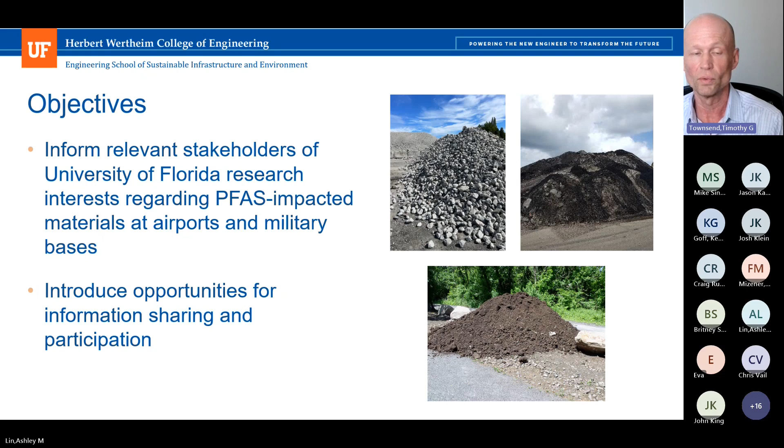So I have a team of students here who are going to present here in a second. So I'm gonna let them go through some of this. But next slide, please, Ashley.

So big picture, again, I don't need to share with you the fact that PFAS is a challenge when it comes to these types of facilities, whether we're talking about airports, private public airports, or whether we're talking about military bases, DoD facilities, federal facilities. But the use of AFFF, of course, has resulted in challenges with regard to PFAS.

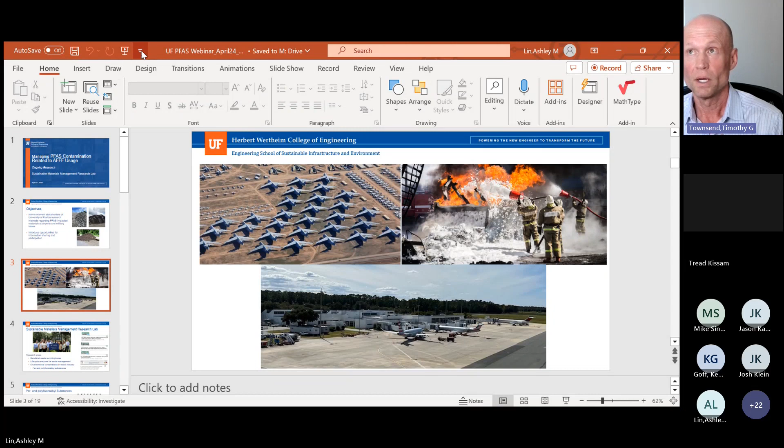Our involvement with PFAS really started looking at municipal solid waste landfills and what's in leachate. But PFAS is everywhere. One of the big challenges is at these facilities where AFFF is used.

That involves not only potential contamination of soils, and this is something that a number of facilities are dealing with or trying to figure out what to deal with. It also involves the pavements. And so asphalt and concrete pavements at these facilities are growing interest because of the amount of historic AFFF and PFAS that now resides in them or has been applied to them.

Looking at not only what to do about the existing pavement areas that have PFAS in them - are they a potential source, an ongoing source, for example, to PFAS in the environment? But what do you do with these materials once they are ultimately discarded?

Concrete and asphalt, very heavily recycled materials in the state of Florida, in the United States. And so a very valid question is how does the presence of PFAS as a result of AFFF in these pavements, how does it impact recycling opportunities? Or does it all need to be landfilled? And what are the issues associated with that?

We've got a new project which we'll talk about with the kind of, it's an organization, SERDP, which is a DoD, DOE, EPA organization, with a number of other institutions around the country. They're going to be looking at this issue. And what we wanted to do was to give you not only an overview of that ongoing project, but just a few of the more general PFAS related issues and discussion topics that are out there, and share a little bit about what we're doing at the University of Florida.

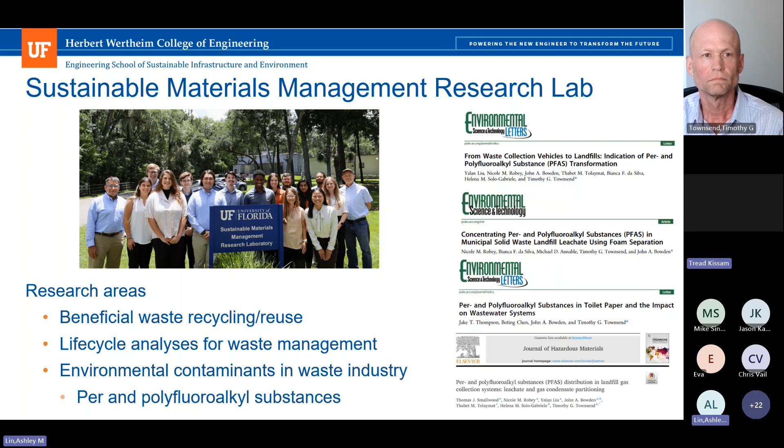We also look at environmental contaminants and their potential releases through our current management strategies of solid waste. This is where our research with PFAS ties in. PFAS are these new emerging contaminants, and we've already published a number of works related to PFAS in different solid waste streams. Many of you already know what PFAS are, so I'm not going to bore you with background, but I want to introduce some topics that will show up later in our presentation.

PFAS are not just one chemical, but potentially thousands and thousands of different chemicals. They're classified by having these carbon-fluorine bonds. They have some pretty unique chemical and physical properties, being both hydrophobic and lipophobic. They're also good surfactants, thermally and chemically stable, and this has led to their extensive use in one particular product we're going to talk a lot about, which is aqueous film-forming foams, or AFFF.

For the last 50 to 60 years, the main ingredient in these firefighting foams has been PFAS. There are about 4,000 different chemicals, and the types of PFAS used have changed over the years, which has led to issues. PFAS are thermally and chemically stable, which means they're also thermally and chemically stable in the environment.

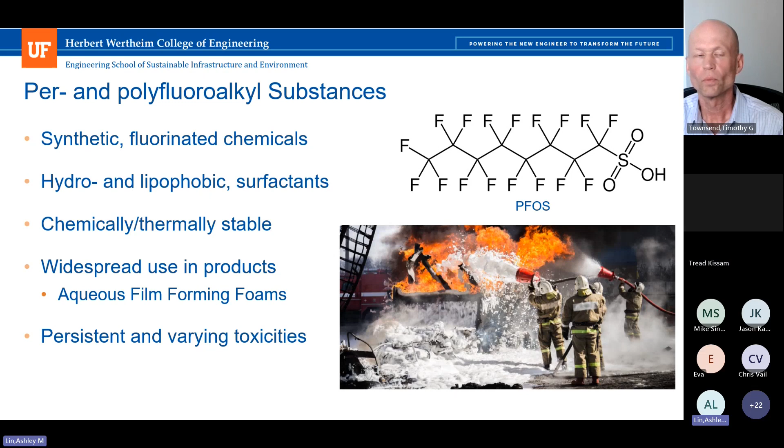With new toxicity information available, there's been a push from regulatory agencies to start regulating certain kinds of PFAS in different environmental matrices. This is where there's been a drive for this research we've been doing. Some background on our previous work: we've looked at things like wastewater sludge and landfills.

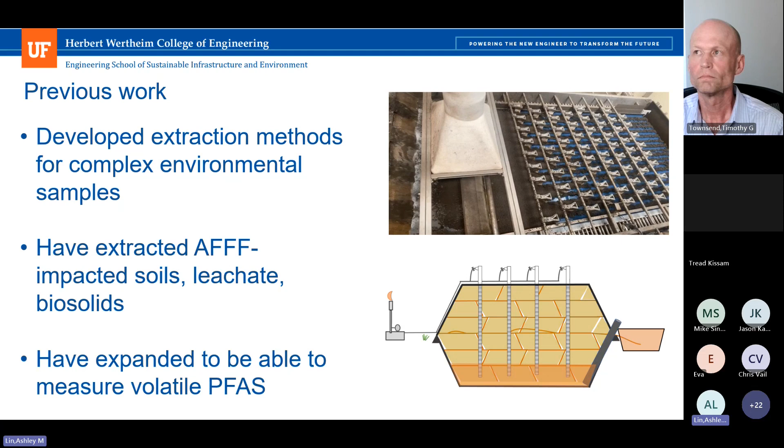These are complicated matrices to work with. We've also looked at landfill gas, which not a lot of labs are analytically capable of looking at for volatile PFAS. Building upon all this work, we've developed a very robust method, or number of methods, to look at different kinds of PFAS depending on what we're interested in.

We have pretty advanced analytical capabilities compared to all the other labs, especially in the Southeast, that could do PFAS analysis. We can do target analysis of 92 PFAS. We have a targeted method for volatile PFAS that we just developed. We also have a non-targeted analysis method where we can potentially look at these thousands of other PFAS that we're missing.

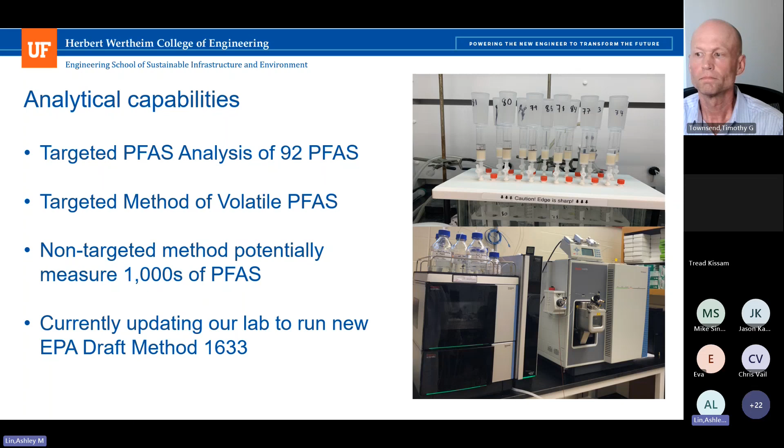There's potentially thousands and thousands of these other PFAS that could be used that are going under the radar. We're currently working to update our lab to also run the new EPA draft method 1633, so that way all our results are comparable to other laboratory groups running that method.

This previous work really sets us up well to answer some of these remediation challenges that Dr. Townsend mentioned previously. AFFF and PFAS impact has become a very hot topic recently, and there's thousands of sites across the United States that have been identified as containing high levels of PFAS through the historic use of AFFF. We see not only remediation needs regarding soil and groundwater, but an issue Dr. Townsend brought up.

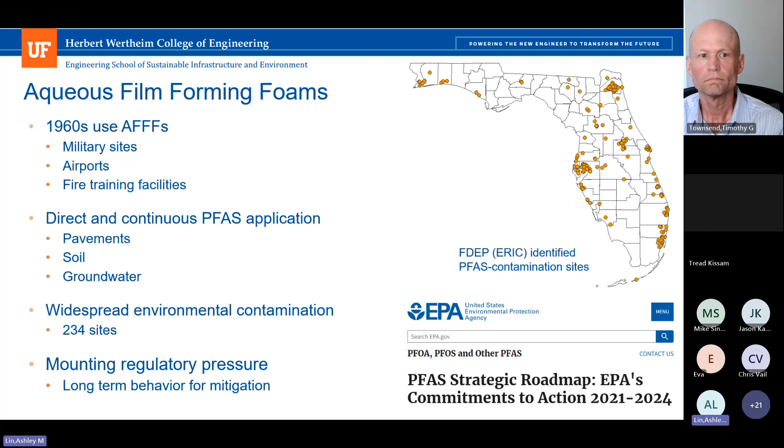Something that Allie's going to talk about is the pavements. And then also, once you have all this impacted material, how do you actually manage it in an effective way? That's something I'm going to pass over to Ashley to talk about, which is the management of soil once you've addressed excavation.

Just to reiterate a couple of things that Dr. Townsend and Jake mentioned, there's this real push for regulation nationwide with regard to PFAS impacted materials. Currently in our management strategy, we might have an impacted site, and what that might involve for remediation or management is that we go to that site, we excavate these impacted materials, and traditionally what we do is we will landfill that material.

Through research, even in our group specifically, we understand that landfills aren't a long-term management strategy for PFAS because it's essentially just like a retainer for it. Eventually, PFAS mobilize from landfills into the leachate that's generated, or even in the gas that Jake had mentioned earlier. So really landfilling or even stockpiling ultimately is just this Band-Aid solution.

Ideally, we'd be able to actually address the problem and treat the materials. But there are a lot of questions remaining with traditional treatment technologies or even emerging treatment technologies with regard to PFAS contamination. So obviously, a lot of people are interested in this issue, and a lot of research has been conducted on PFAS treatment.

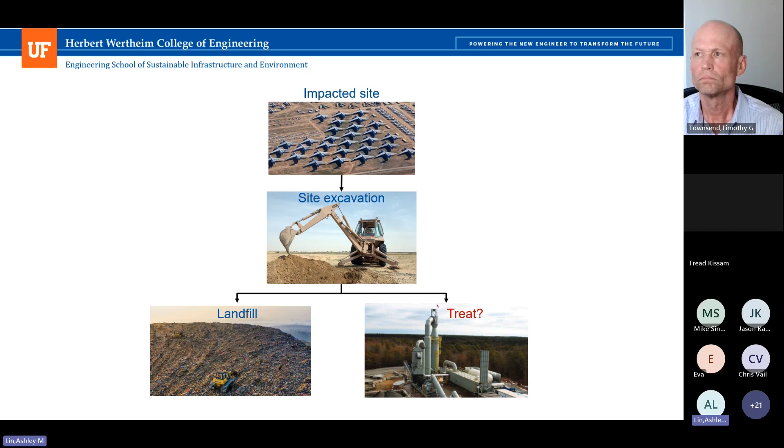So what a lot of research and science has shifted towards is investigating traditional technologies such as thermal desorption paired with oxidation, where essentially you just take contaminated media, you desorb the contaminants off of it at a lower temperature. In this case, it's PFAS, right? And then that off gas gets sent to a higher temperature unit where the destruction really occurs.

But we have a lot of knowledge gaps in terms of PFAS. So in an ideal treatment scenario, you might have a PFAS contaminated media. You put it through some form of treatment, and the outcome that you're looking for is that you have made all of the fluorine and the potential PFAS present in that media inert. And so if it leaches, which it shouldn't, there won't be environmental risk or harm associated with that material. And then we can effectively manage it without having to worry about environmental implications later on.

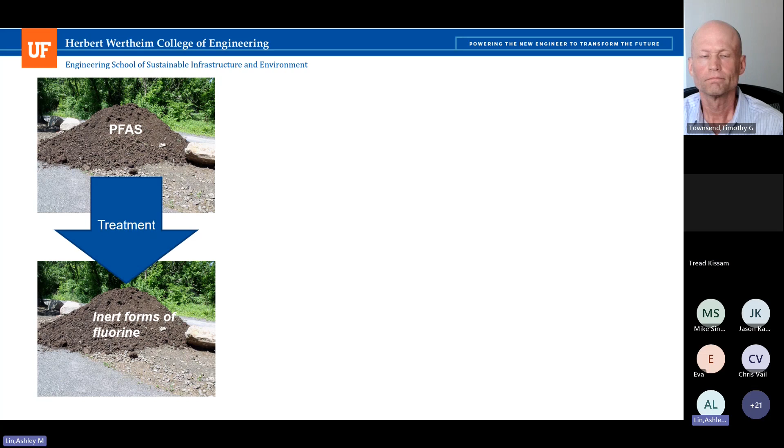So when we think about traditional thermal treatment and apply it to the same concept, a lot of the issues have to do with primarily the scale of it. So at the laboratory scale and even smaller pilot scale studies, people have done this work and looked at PFAS treatment and desorption oxidation. But when we talk about large quantities, there really isn't a single study out there that's been able to successfully assess if this technology is efficient for PFAS treatment, and also really assess the harm of the emissions that come off the material.

So just to kind of walk through that emissions part of it, it's essentially you have, for example, one PFAS present in your soil, which this is just an example. There are thousands, obviously, and hundreds potentially in impacted materials. But PFOA, for example, we might take it through a traditional remediation technology.

But if you don't apply enough thermal energy and you're not applying the correct analytical tools, you're going to miss some things, and potentially there will be this formation where you fragment only partially, and then you form these short chain, we call them products of incomplete combustion. So CF4, C2F6 are some examples, and these are really persistent and also mobile in the environment.

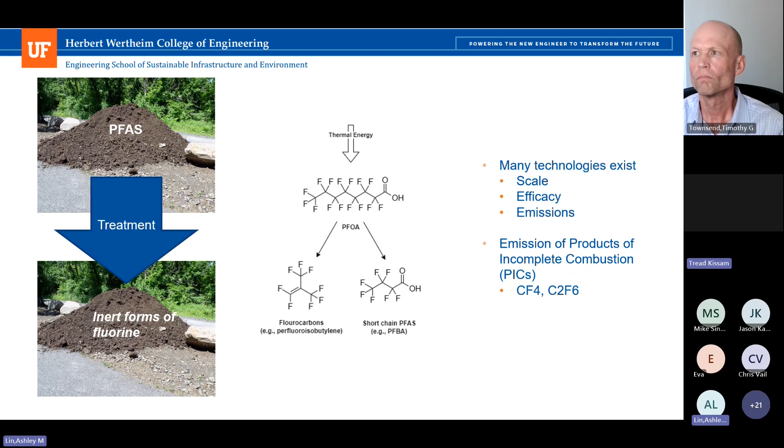So there's really that major question about emissions, and we have a lot of ongoing research at the university related to these problems in PFAS, but also just the things that we're going to really focus on today, which is this DoD project, essentially, that falls under DoD. A lot of you have probably heard of it.

I'm sure a lot of you are familiar with the grant or the project, but we're one of many teams that's interested nationwide in understanding PFAS impacts at military and airport and DoD sites. So I'm going to pass it off to Allie, and she's going to talk a little bit more about project specifics with this upcoming work.

Thanks, Ashley. Yeah, just to give a little bit of background on our work with SERDP and where we go from here. So in 2022, there was a request for proposals to investigate the leachability of PFAS from these pavements that have been impacted with AFFF at the facilities that we've been talking about so far.

In 2023, we were awarded the SERDP grant to pursue this research, and now as of 2024, our contract has just been initiated. We have almost the green light to get going with this work, which is very exciting for us, and we're still in the early developmental stages, which is why we're here to talk today.

To give a little brief project overview, we think about the project in 3 different tasks, just to help us compartmentalize what's going to be going on.

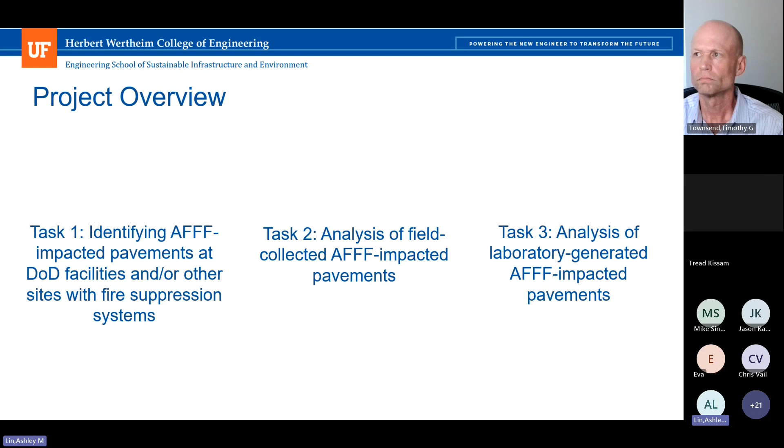In task 1, we are going to work to identify AFFF impacted pavements at DoD facilities and other facilities that have fire suppression systems using AFFF that has PFAS in its formulation. Thankfully, there's great record of where AFFF has been used, but this only tells us so much, and there's a lot of anecdotal information that we lack as a university, and that's where stakeholder information becomes very relevant to us.

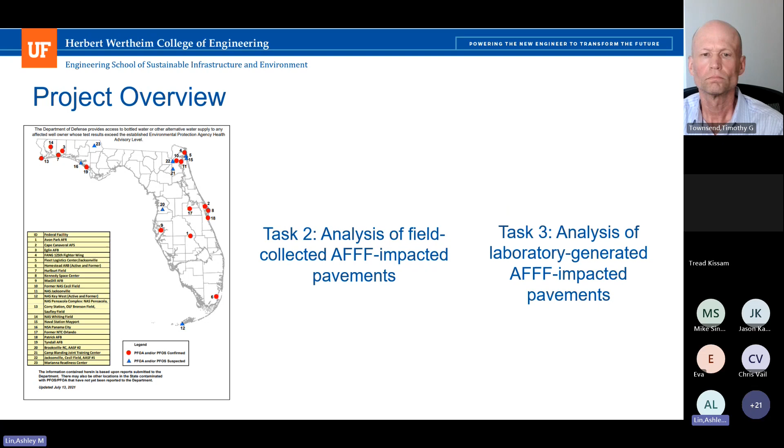Then in task 2, once we identify those sites and narrow down our scope of work, we're going to go out and collect some AFFF impacted pavements, ideally with the help of some facilities, and we'll analyze them in the lab with a variety of tests to evaluate the mobility under different conditions.

In task 3, we will take it another step further and generate our own pavements here in the lab and expose them to AFFF and evaluate the leaching in a lab-controlled setting.

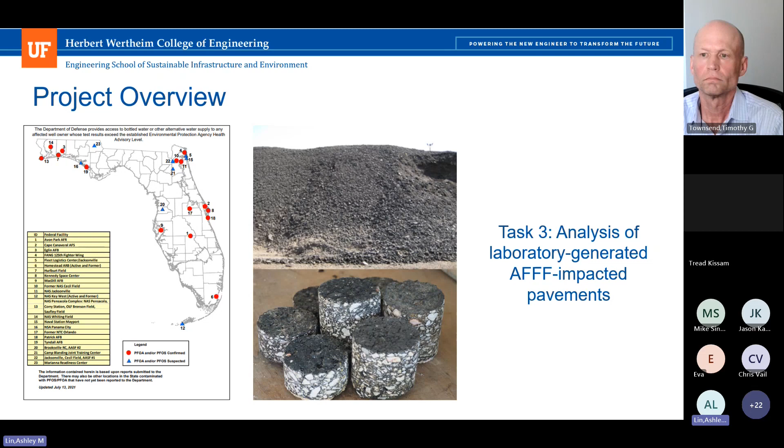Those field pavements give us a great wealth of knowledge, but they really only give us a snapshot of that pavement's life. That pavement had a life before we met it, so we are going to look at the lab-generated ones to give us a more thorough look at the lifespan of the AFFF on the pavement. We'll do that in a couple of different experiments.

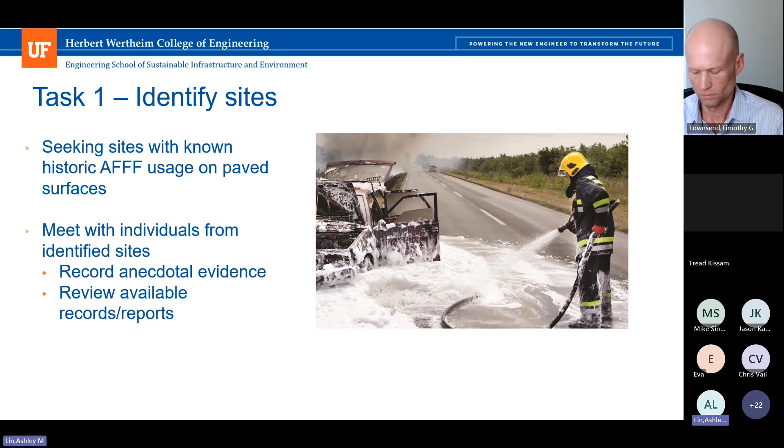Diving further, as I mentioned, we're seeking sites with known historic AFFF usage on paved surfaces. We'll hopefully combine the available records and reports with some anecdotal evidence from interested stakeholders to help us build a thorough knowledge of what's going on here in the Southeast and move on from there.

In task 2, the first part is collecting these pavements. The goal of this part of the process would be to conduct an initial site screening visit to find those suspected areas and narrow down where we're looking.

We'll start with a non-invasive superficial drilling for pavement dust, analyze that back at the lab, and make sure that it meets the requirements to be a good candidate in our study.

At which point we will go back out and collect those AFFF impacted pavement samples from the sites we've already screened, and ideally we'll collect both cores and crushed pavement if there are stockpiles on site. Any candidate site could have one or the other or both, but we're really just hoping to build a good data set with a variety of different pavement types.

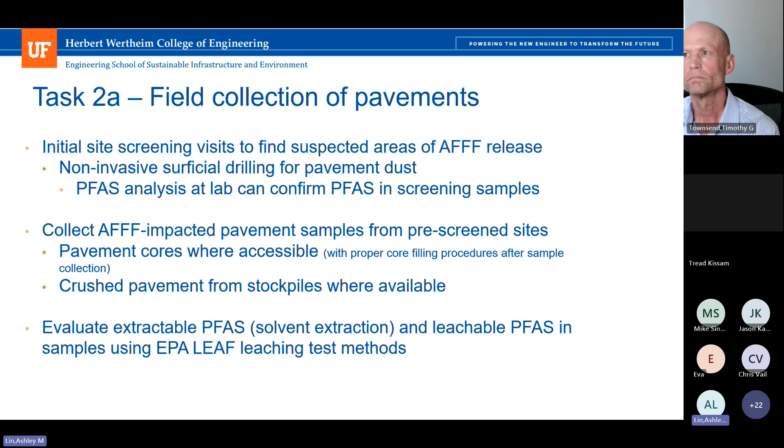Once we get those samples back to the lab, we'll evaluate PFAS in 2 different ways: extractable PFAS with a solvent extraction, and leachable PFAS using EPA test methods that our lab has built up over the years and with experience.

EPA has a variety of test methods to evaluate leaching under different conditions, and so we will evaluate these in the lens of PFAS. The first test method we would use is the pavement cores in a monolith leaching scenario.

Hi. Hello? Okay, I'll continue. Thank you.

The monolith would be submerged into a container of water, and then the water is sampled at distinct time intervals so that we can build an understanding of the time scale of leaching and the liquid to solid ratio of leaching in a monolith scenario.

We would also employ a batch leaching test where maybe the cores are crushed into a smaller size fraction, or we use the pre-crushed debris, and we rotate it end over end at a liquid to solid ratio of 10 with clean water and evaluate the leaching in that scenario.

Based on those results, we may pursue an additional test method to look at flow-through leaching for PFAS. Typically these tests are done for permeable materials. Of course, we're looking at pavement, concrete, and asphalt, which are not typically very permeable, so this will be a little modified, but it would help us look at the flow-through leaching given the results of our other tests.

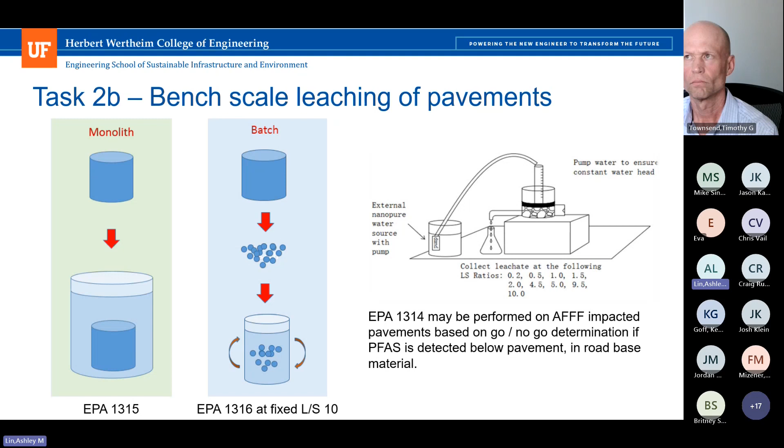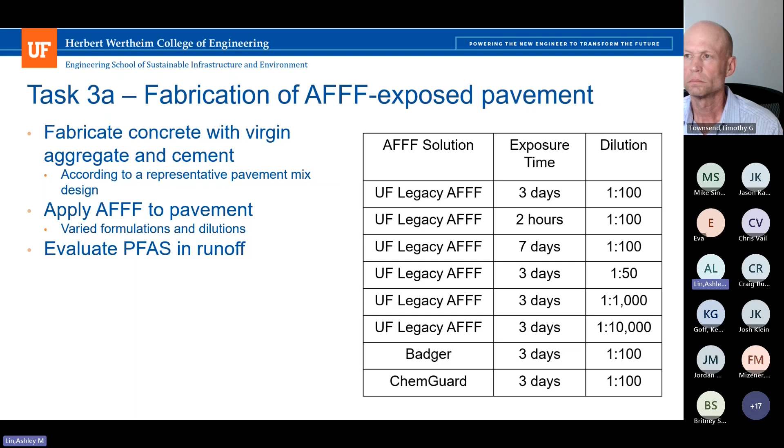At that point, we'll apply AFFF to the pavement according to the varied formulations and dilutions shown in the table on the right side of the screen, and evaluate PFAS in the runoff. This gives us more control to observe the way PFAS leach off, and hopefully we can build an interesting curve showing how they run off.

When those pavement slabs are finished with this leaching runoff experiment, we can take the slabs and create our own cores, measuring how deep the PFAS may travel into the concrete over time.

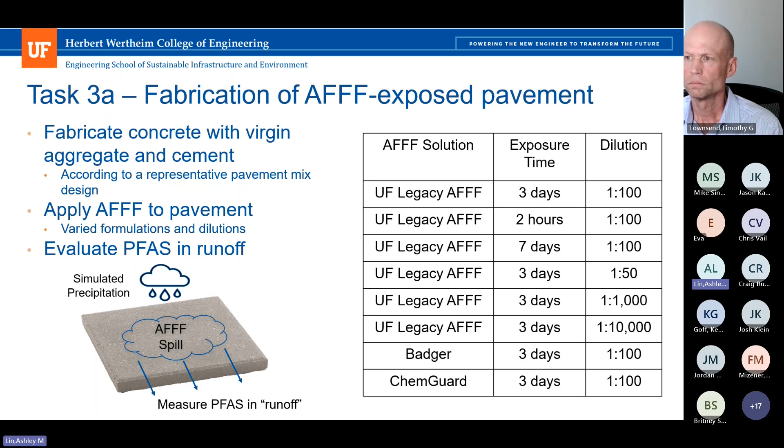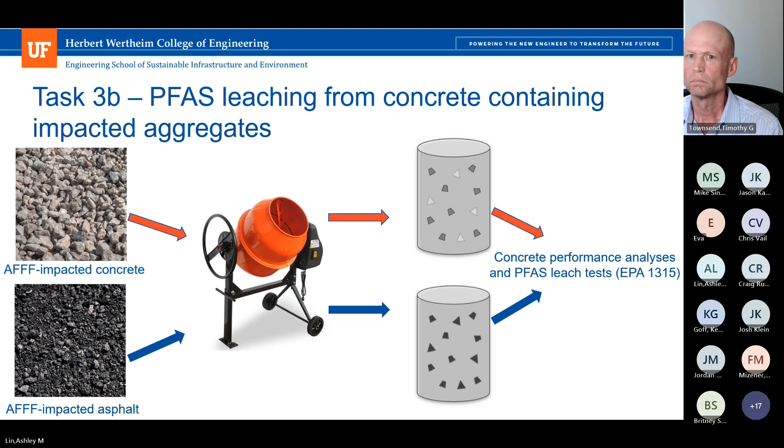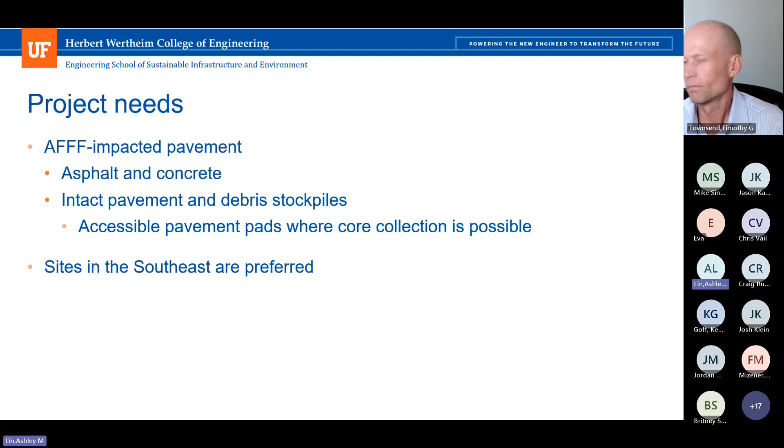Thank you, Allie, Jake, and Ashley. The idea here was for stakeholders associated with the issue of AFFF and PFAS at airports, military bases, and DoD facilities to understand that at the University of Florida, there's a concerted effort to examine PFAS, particularly as related to this issue and these materials. We wanted you to know these efforts were underway, and we welcome the opportunity, as the state university, to learn about what concerns and issues you have.

We wanted to share that there's a new SERDP project, with a number of universities around the country doing this work, and there will be an integrated effort among these universities to figure out how best to go out and get samples. Many of you on the DoD facility side may have already heard about this and perhaps been contacted, but the idea is that we'll be one of the players in that, and we certainly welcome the opportunity to talk more.